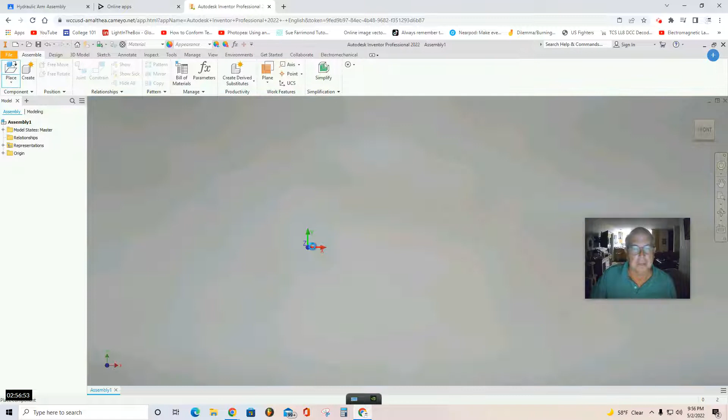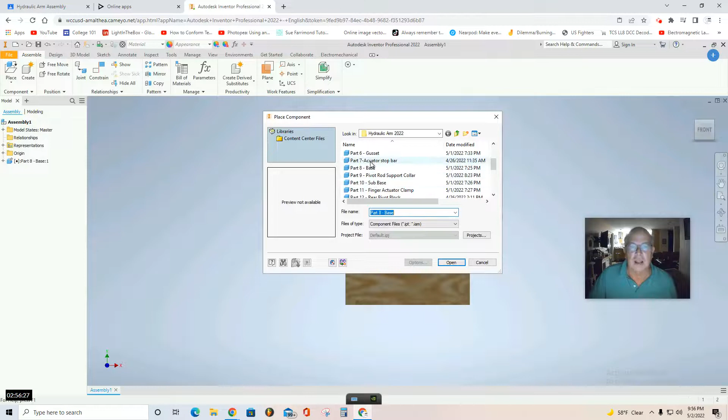And then hit Escape once you've placed it, and immediately right-click and select Grounded. That will lock the base to the rotation cube here. See? Now, place, and it looked to me like you're going to need Part 7. So you just scroll to Part 7, Actuator Stop Bar, and select Open. Click and place it there.

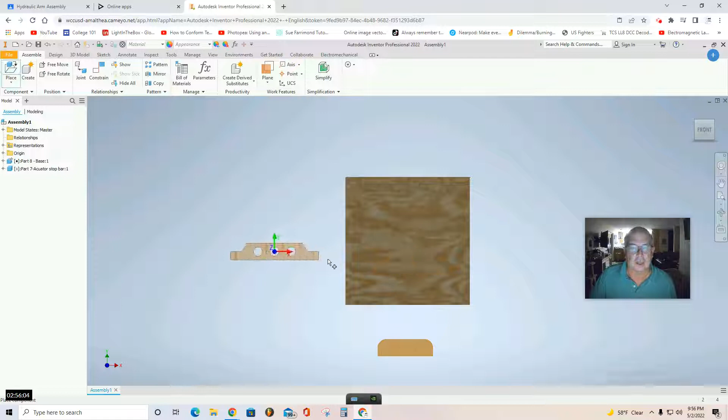Now, I'm going to need Part 16. So again, return to Place, scroll to Part 16, Actuator Control Panel. Click and place it here. Hit Escape. And I'm actually going to continue farther down this list until I find the drawing which shows you the specs and how to place all these pieces on the base. So what I'm going to need is the yoke, I believe it is called.

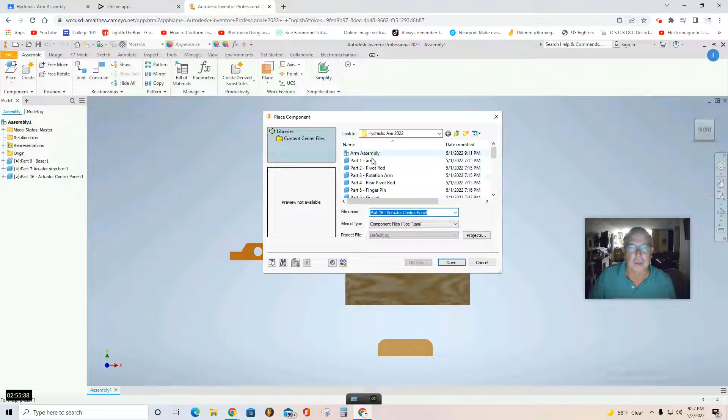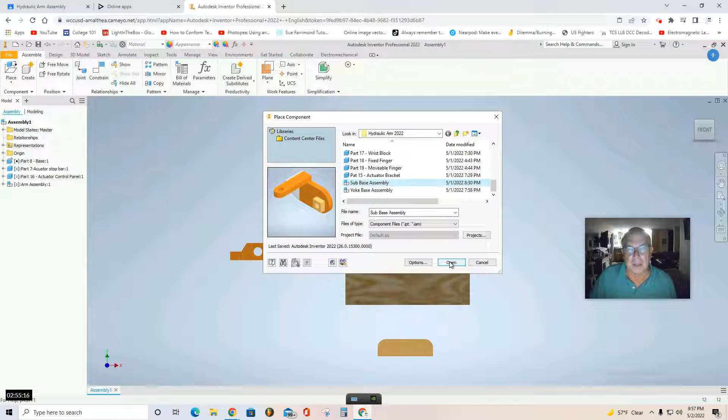Well, let's place the arm assembly. All little sub-assemblies, we'll place them all just to get everything in front. Click. That's the arm assembly. Now I'm going to place the sub base assembly. Click. Hit Escape. And I'm going to place the yoke base assembly. Click. Place it over here. Click. And I believe I do need what's called

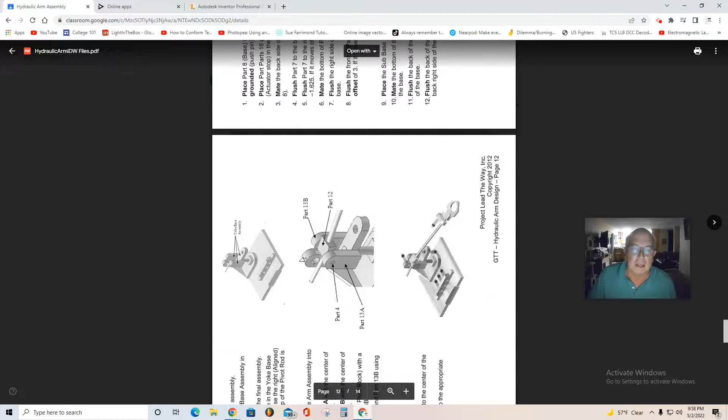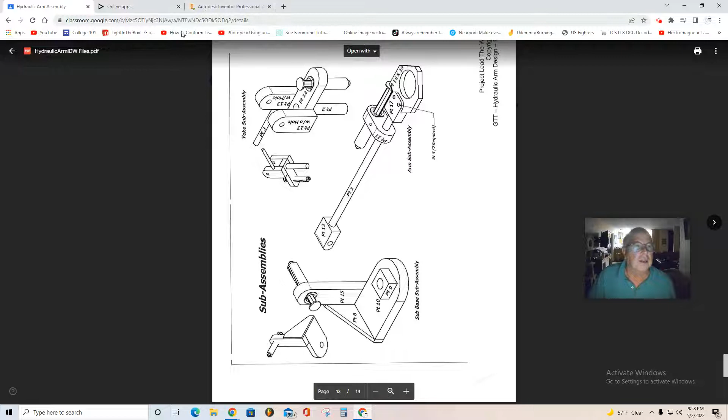I think that may be it. No, I'm going to need the pivot rod. Part 2. That's what I need. So return to Autodesk Inventor, place Part 2 pivot rod. Click and set it there.

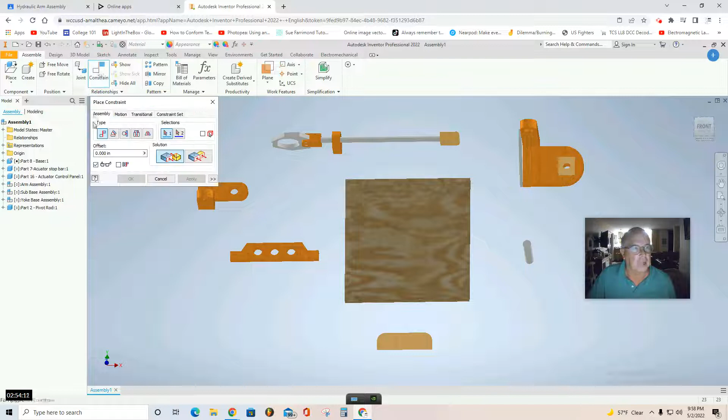All right. Now that I have all these, let's glue this into position. So this is a stop bar. I'm going to use the constrain tool a lot here. Constrain. We're already in the mate. So that means I'm going to place glue right on this surface. Click. And then I'm going to rotate and select this surface. Click. And apply.

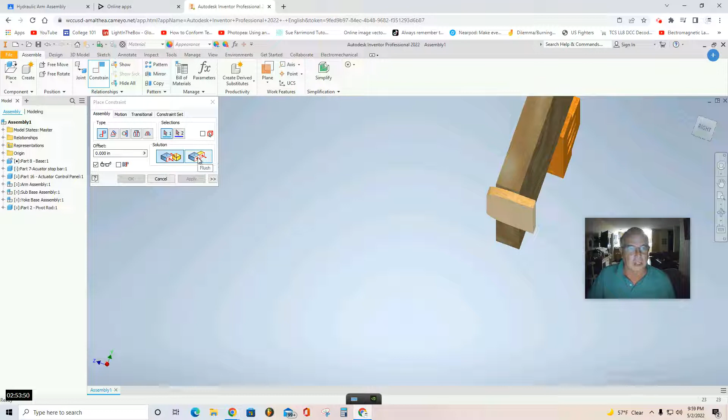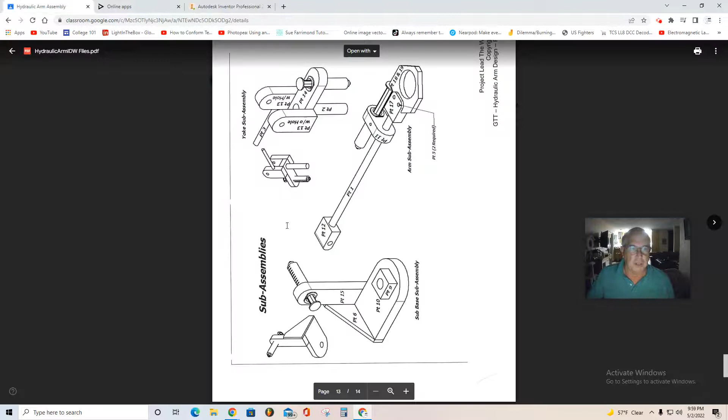Then I click the flush. Click. And I'm going to select the bottom of this surface here. Click. And the bottom of this plywood base here. Click. And apply. And then I'm going to look at the spec sheet I was telling you about. Here it says it needs a 2.5-inch offset. So I'm going to use the flush tool.

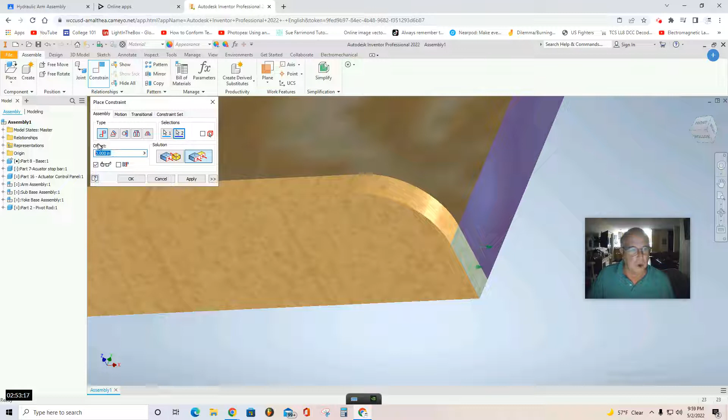So I select flush. I'm going to select this surface here and this surface here. Click. Now that's flush, but you want to enter on the offset 2.5. See how it moved it to the left, and then apply. So that part is in position.

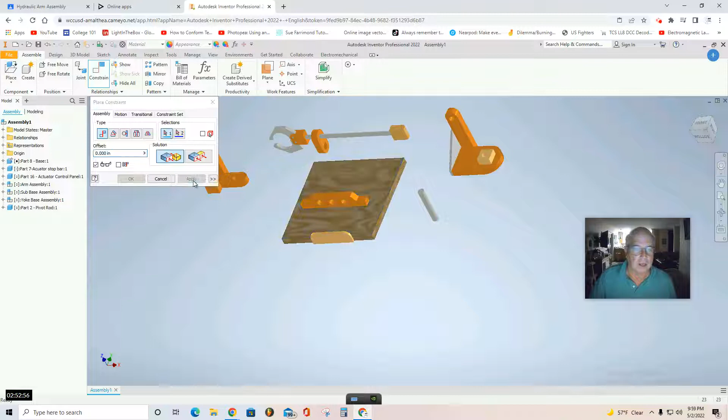Now I'm going to use the mate tool again. So go back to the mate tool and I'm going to select the bottom of this part here, click, and select the top of this plywood here, click, and apply, and return. It shows that it's got a 2.7 inch offset and a 1 inch offset.

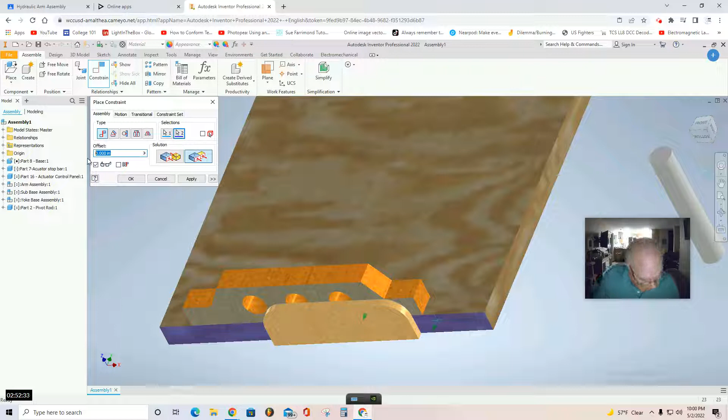So go back to the flush tool, click, and I select here and here, click, and then select offset of 2.7, see, and apply.

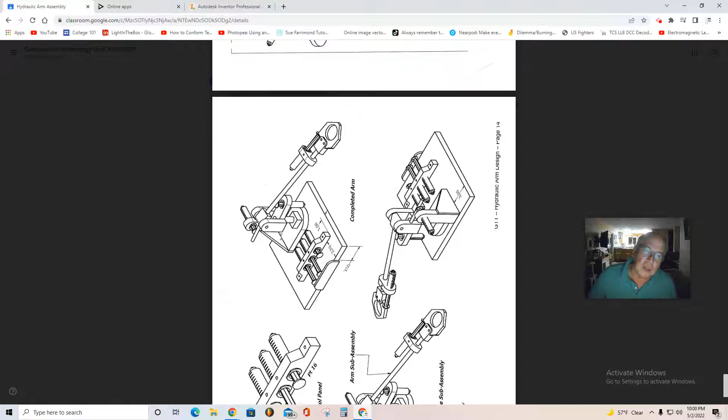And then I'm going to use the flush tool here and here, click, and put a 1 inch offset, 1, and apply. So now I've met the specs for this part. Now I'm going to place this assembly here, this one. So I'm going to go back to the mate tool, select the mate,

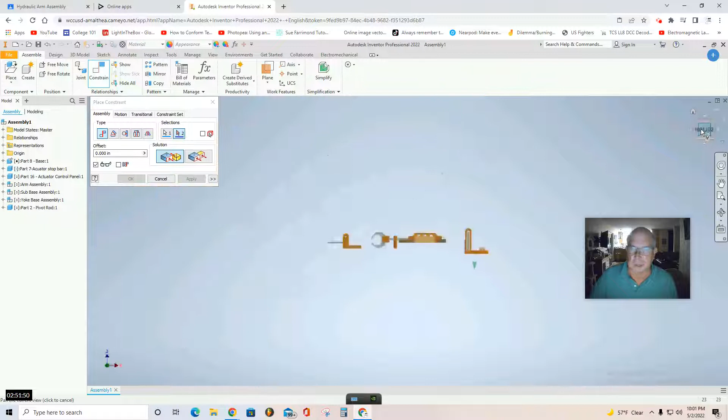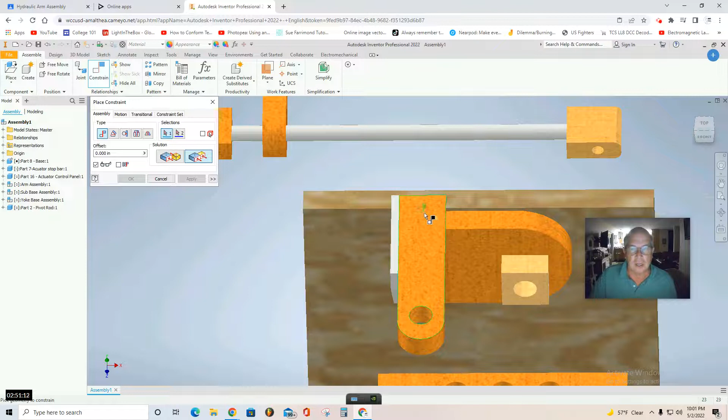and then I'm going to find the bottom right here, click, where I apply some glue, and then I'm going to apply glue here, click, and apply. And I'm also going to select flush. That drawing again. It does look flush on the back. So I'm going to select flush here, flush, here, and here, and apply.

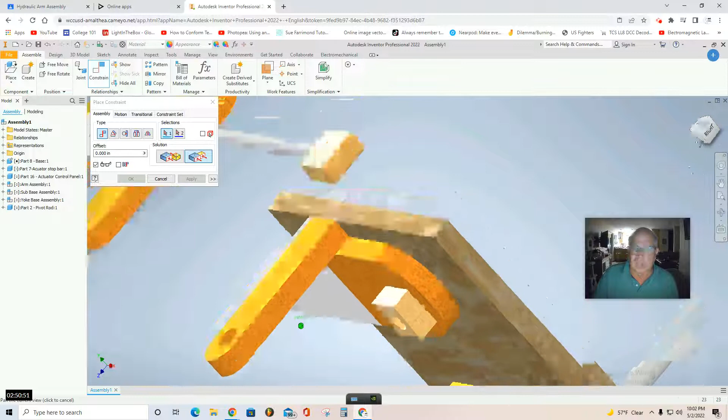And then I'm going to look at the spec again. And here I see an offset of 3 inches. So I select the flush tool, and then from the back side of this gusset, let's get it back on track. When in doubt, just square it up right here. So I'm going to be using the flush tool, flush here, here, and then enter 3 and apply. Now that's locked into position.

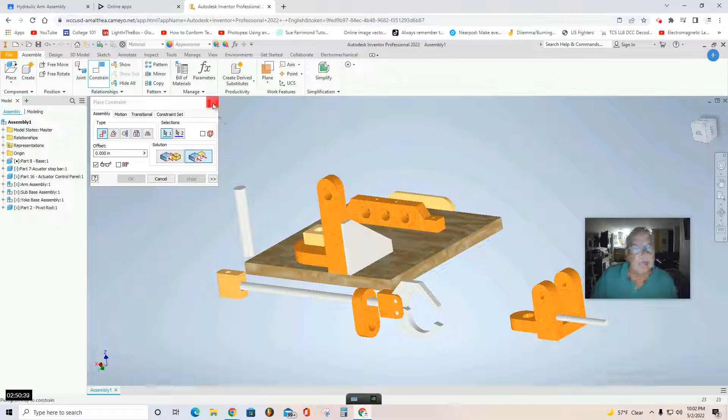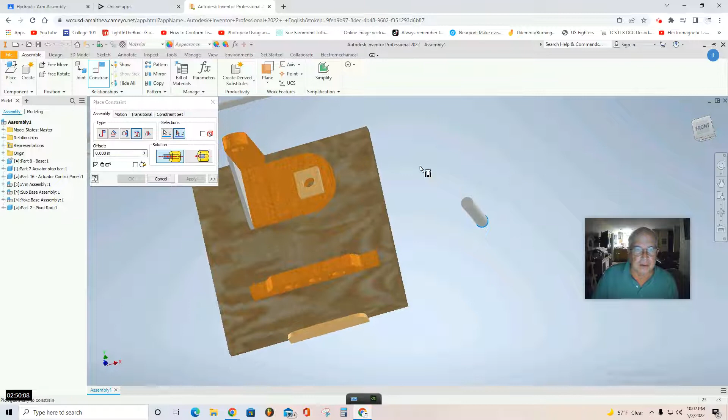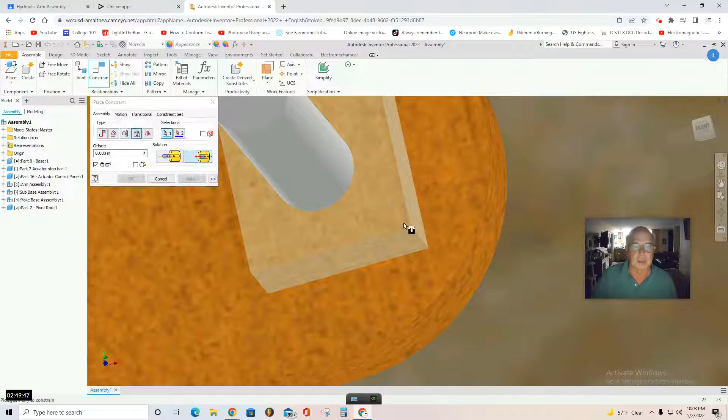Now I'm going to insert the pivot rod. So you go to constrain, use the insert tool here, insert, select this ring to apply glue to, click. And then if you look at this more from a top down point of view and go all the way to the deepest interior ring here and click another ring, which applies glue, click. Now, if the pivot rod does not stick in the right direction, just select the opposed option and it will reverse the direction and put it in the right position. Apply. So I now have that in position.

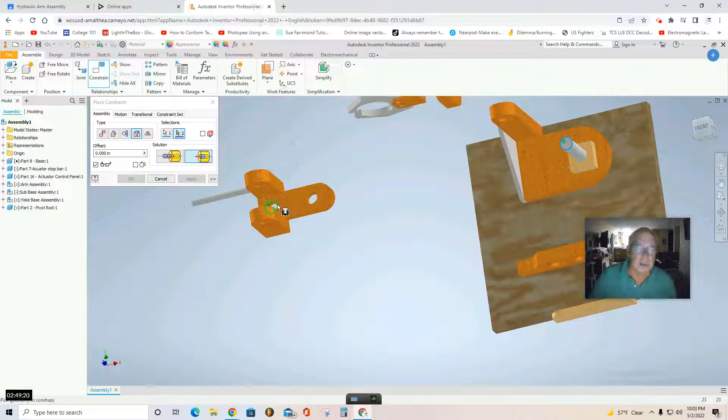Next, I'm going to use the insert tool yet again. Select this and this. Am I right? Wait. Let me double check that. Actually, you want to select this ring here. Click and apply. That looks ideal. And now I'm going to use the insert tool here, here, apply. Now I've got it correct.

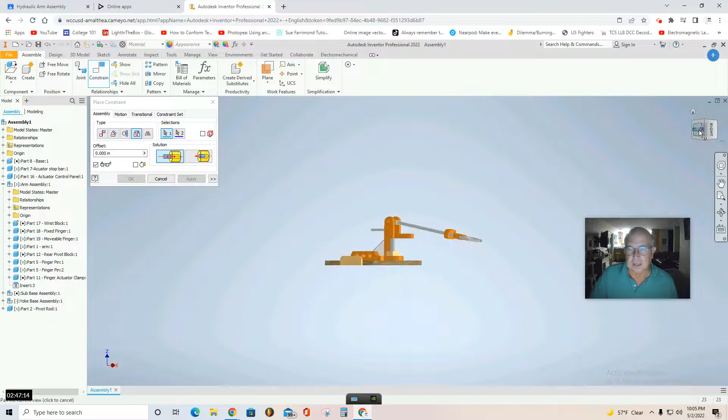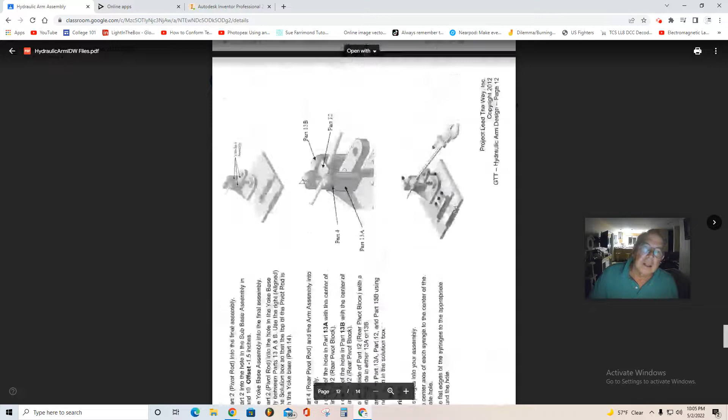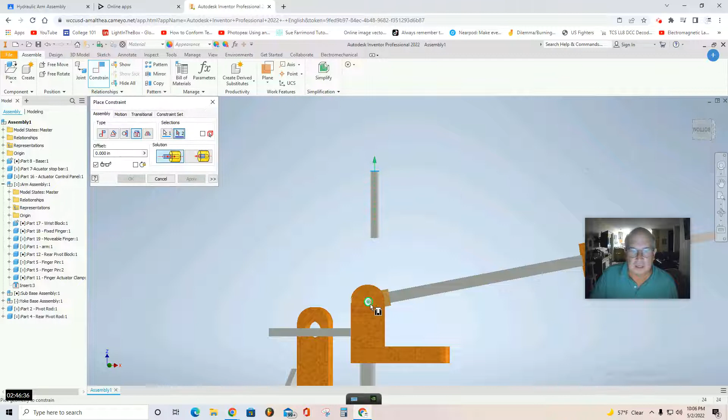And finally, there is one other piece that you would put in to make this perfect. It's part 4. So place part 4 called the rear pivot rod. Open, click, select constrain, insert here, here. And again, if it doesn't insert, you just flip the solution and apply. And then adjust.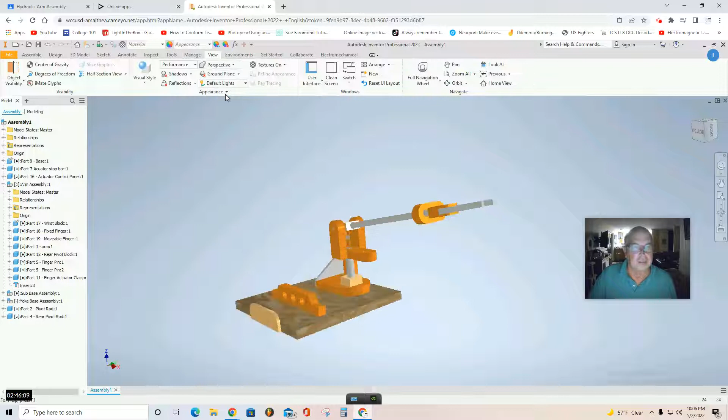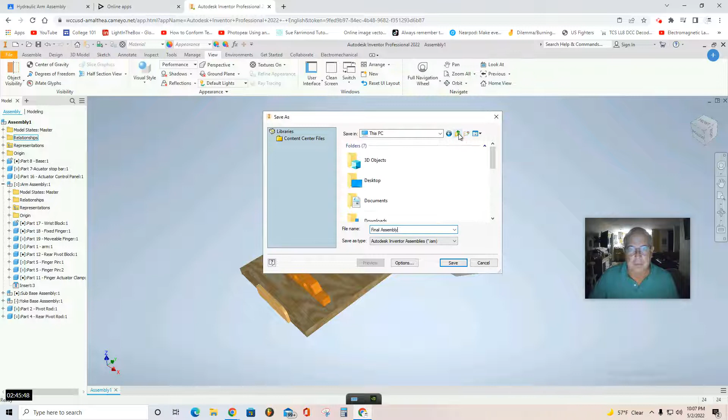And as near as I know, that is the correct construction of the final assembly. You can angle it to an aesthetically pleasing angle. Don't forget to select File, save as, rename it to Final Assembly. Navigate up, up, up to remote user, double click from there to G drive, hydraulic arm, Final Assembly, IAM, save, and double check your work to make sure that it looks just like this.

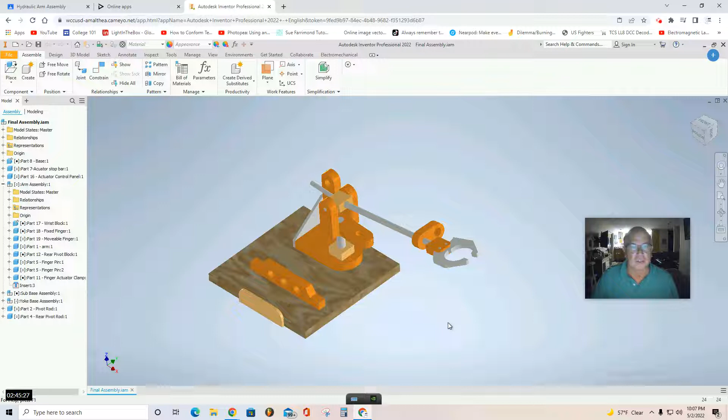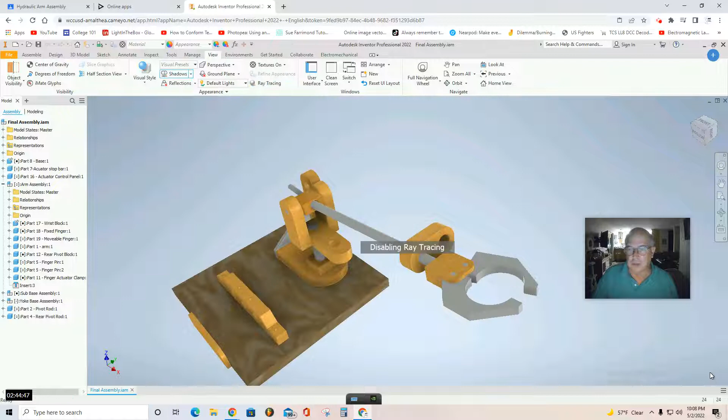Once again, place it in perspective. Maybe you want to hit realistic, even ray trace it if you want. I have shown this in the past. Disable the ray tracing momentarily. It says bottom, but that's my front. So I'm going to right click on the cube, set current view as front, and that way I'll get my shadows in the proper position. And then hit ray tracing again. Zoom in again to get my best screenshot for my portfolio. That looks good right there.

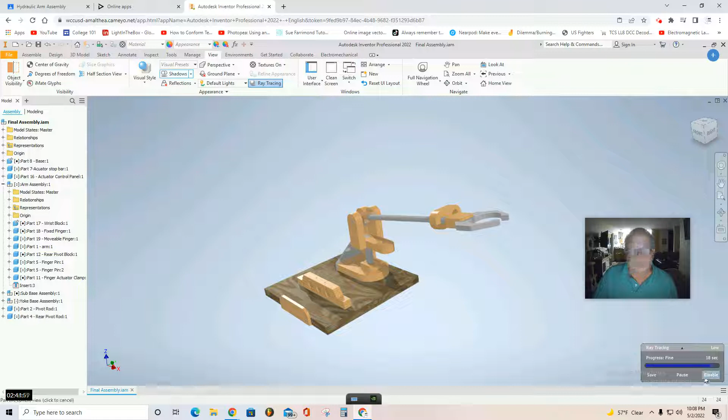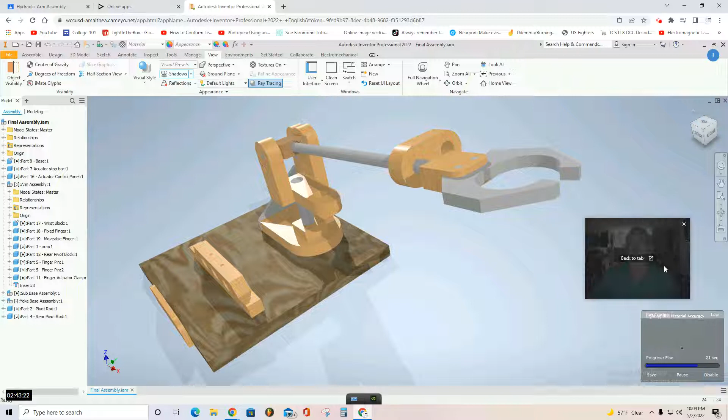I might just disable and try one more different angle. I like it a little closer, like that. Ray trace it yet again. Once you've successfully ray traced, you just want to hit Control Shift Camera, capture your screenshot, or in my case, print screen. You're going to create an image and turn it in for assignment credit. Final Assembly Part 1. Good luck.